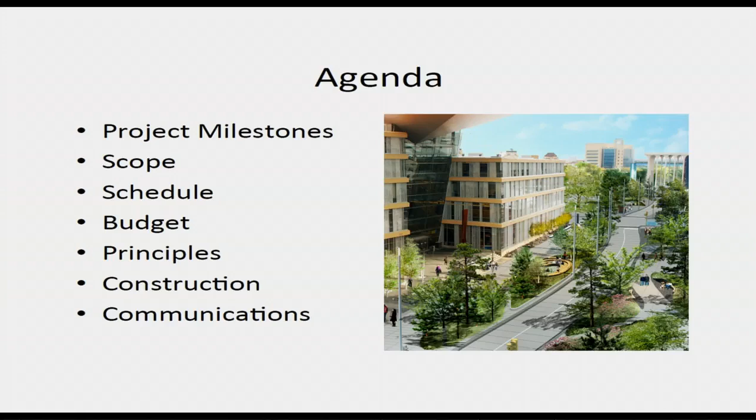Topic for today is Nicollet Mall. No action items needed, it's just an update of the project and where we're at. Today I'll cover project milestones, scope, schedule, and budget - those are pretty standard items. I want to review the project principles, go through construction with photos, talk about our communications, then look ahead into 2017.

I think it's good to review how we got to where we are today. In 2012 and 13, we established an implementation committee and got the design going. In June of 2014, we had the concept design approved, and that's when we got the state grant. In May of 2015, the special assessments were approved, and then I had a fully funded project. We told the utilities to go.

In December of 2015, I had a single bid and could not move forward. By May of 2016, we got a redesign done, got the bids out, and awarded a contract to proceed. In June of 2016, we started the roadway project for Nicollet Mall.

Generally, the scope is total redesign and reconstruction, building face to building face, from Grant to Washington. We're taking out the slippery granite pavers and sidewalks, the roadway, the lights, signals, bus shelters, everything's coming out. Along with that, most of the utilities are being upgraded along with the project, the underground utilities.

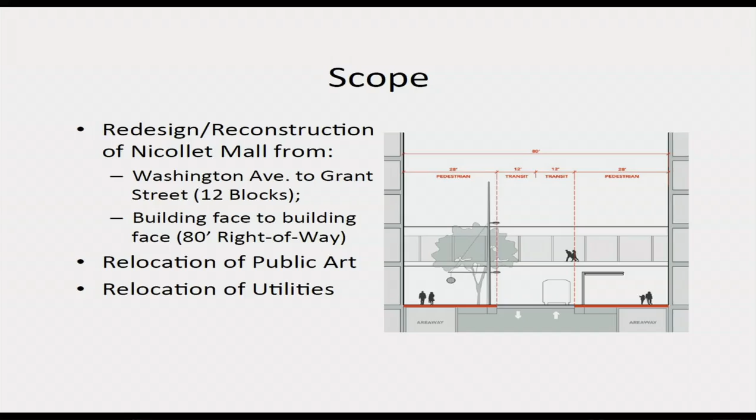What we're putting back: a new pedestrian clear walk zone, more green and trees with plantings. A new elegant lighting system will go in. The old lighting was low, shined in your eyes, created a lot of glare. The new lighting is very high, and more uniform lighting is going in.

And raised intersections, making pedestrians a priority, where the roadway comes up to the sidewalk level so it's straight across for the pedestrians. 11th Street is a good example. That intersection is nearly complete except for the signals going in. If people want to see what that's going to look like, that's in place right now.

Schedule for the project - there's a little red dot that shows where we're at. This is a schedule going back to 2013, but essentially the utility work began in 2015. The main roadway work is in '16 and '17, and we're on track for substantial completion by the end of 2017.

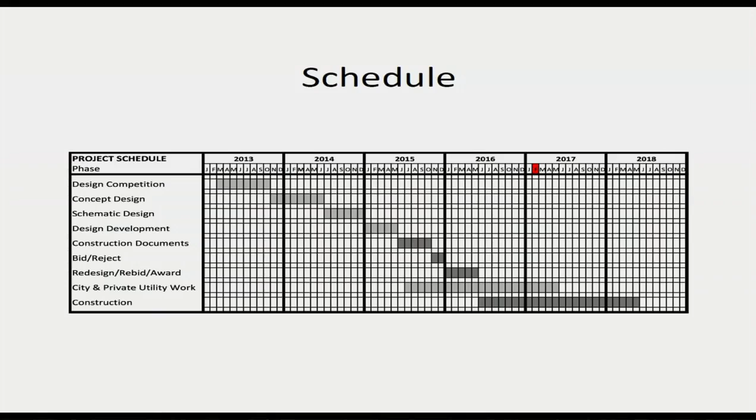Budget - it's a $50 million project. There's $25 million in state grant and city funds. There's $25 million in private investment through special assessments. The project is currently on budget, and it's tracking to stay on budget as of right now.

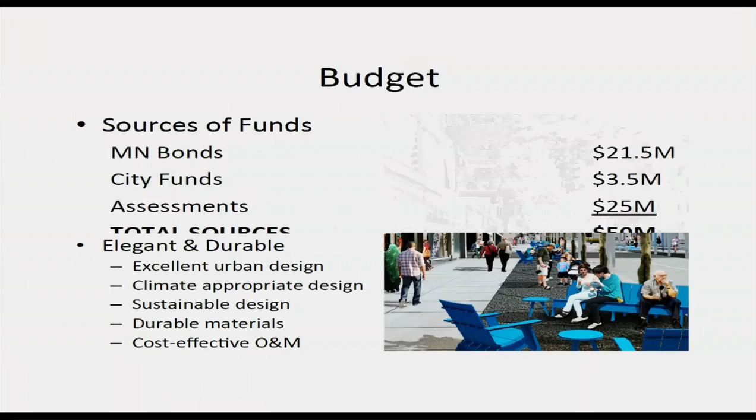Some guiding principles for the project: it's a place for people. It's pedestrian friendly. It's green. It's year-round use, and we're trying to activate all 12 blocks. It's elegant and durable, it has an urban design, and it has cost-effective operation and maintenance for what we're putting in out there.

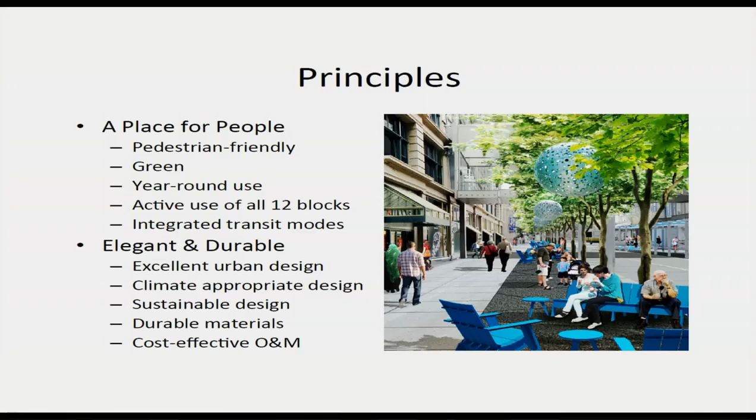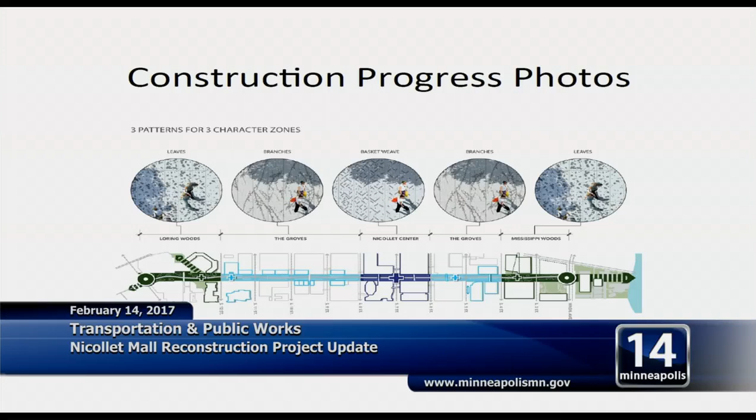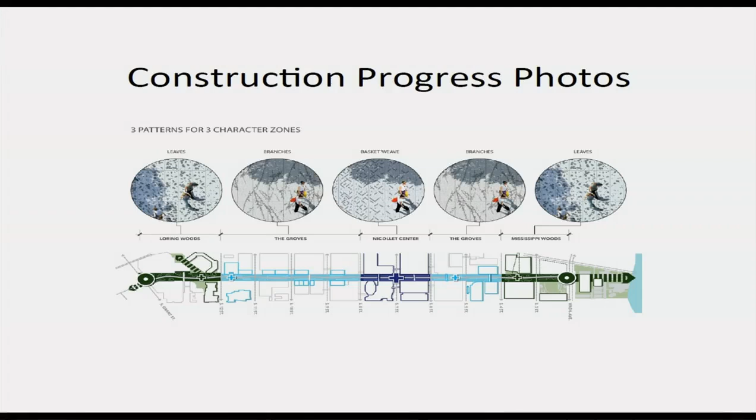Present progress and conditions - there's three main parts to this Nicollet Mall project. I have an underground component, an at-ground component, and an above-ground component. I really have a three-dimensional project going on Nicollet Mall. A large portion of what we do will not be seen by the public, and when we're done, they won't even know what happened. It's all going on underground or right below the sidewalk, and it's a very significant amount of work to get that done.

For the most part, the surface work out there is complete from Grant to 11th, as well as the west side up to 10th. And then there's a portion at the IDS building that's completed. It's ready for trees and lights.

I have some construction photos. This is our stenciling process that we've talked about. In the upper left-hand corner are metal stencils - there's about 32, with 3 different designs, and different intensities of elements in these stencils. So what happens is, on the right side of the screen, after the concrete is placed and sets up, these stencils are placed down on top of that concrete. Then there's a high pressure etching process that goes on, and the end result is that lower left - that's the look and the texture you get to the concrete sidewalk that's out there.

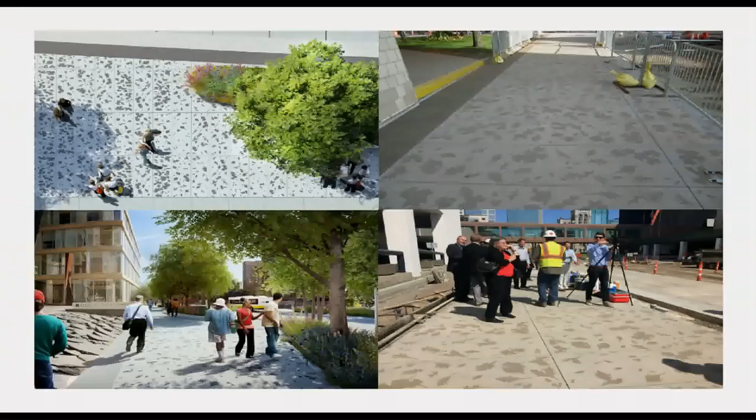So on this photo, on the left-hand side is the computer graphics we were showing through the design, and on the right-hand side, that's what we have. They're very close to what we said we'd do. There's different intensities of the pattern - some are closer, some are farther apart. So what we showed is what we have.

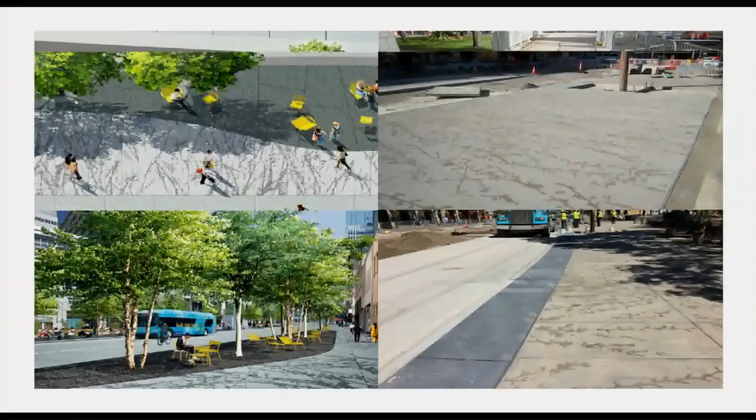In the Groves area, similarly, on the left is what we were showing, and on the right side is what we have today. These are in place. That photo there on the right, I think, is near Peavey.

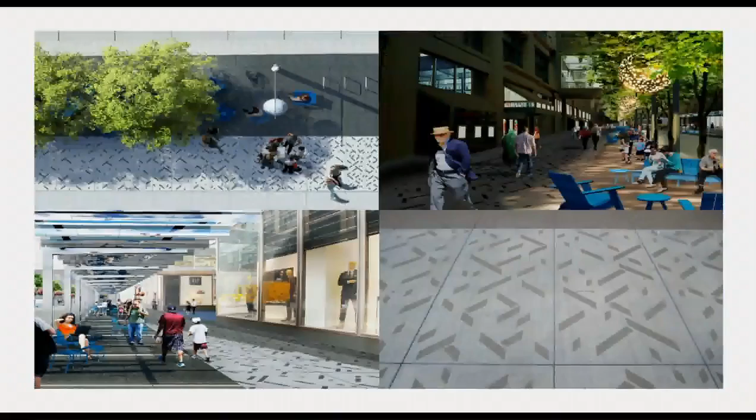And then in the center portion near the IDS, we have that pattern - what we were showing and what we ended up with.

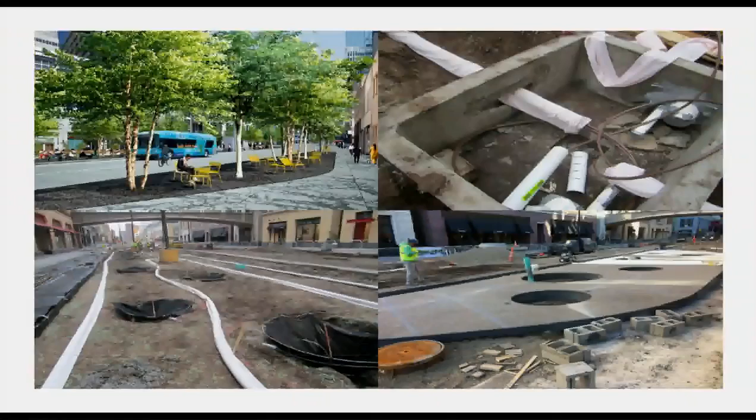Things that go in at ground or just under the sidewalk - we have extensive irrigation going in for the planting areas and the trees. In the lower left, we have tree baskets, which indicate where we're putting the trees. It's kind of a placeholder, reserving a spot for the trees. Then the irrigation system goes in. The upper right, it all connects into a main controller box that will run the irrigation system for the trees and the plantings. Once all that gets put down - I won't say there's miles of irrigation because I don't know the exact fact, but there's a lot of irrigation going in.

It's all covered up with the concrete, so I have to get all that in place. Then that concrete goes down, and it's all ready to go for the trees to come in.

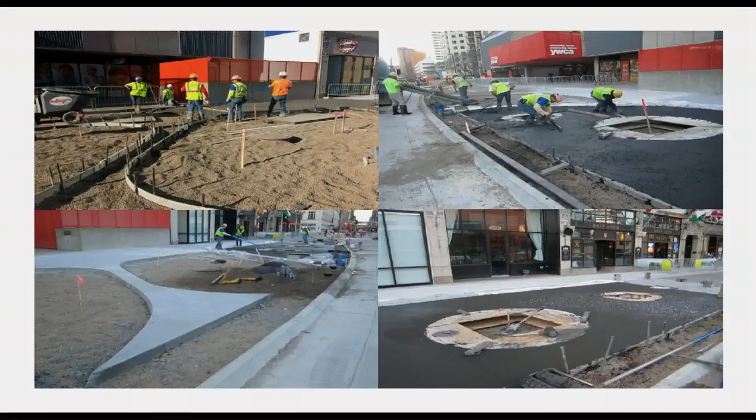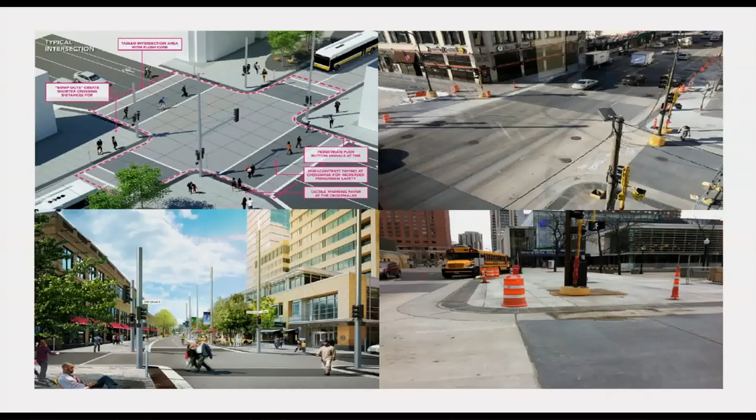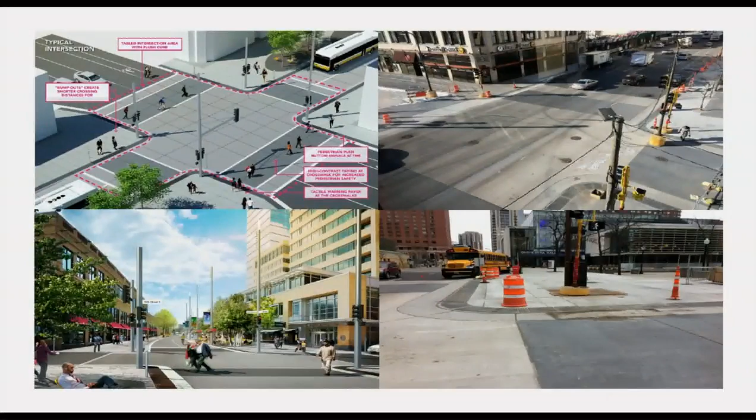The crosswalks are a different color to indicate where the pedestrian should go. In order to put this in, it goes in multiple phases. You have to pour the different colors at different times. I have to keep traffic open for vehicles and pedestrians as well. So the construction of the intersection is very complex, half at a time, keep everything open and get the trucks in there at the same time. But when we're done, that lower right-hand corner gives you a good perspective looking at Peavey, how that sidewalk matches right in at that intersection and what that's going to look and feel like for the pedestrian experience.

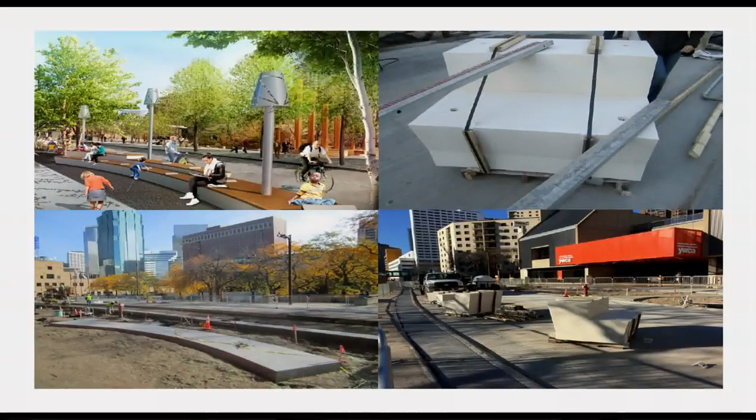Reading room. This is future installation of items. The upper left-hand corner is the concept of the reading room. Lower left is the foundation poured for that bench work, that's in place right now. And in the upper right, we brought in the pieces for that bench. It goes together like a puzzle. And on top of that are wood slats that are being manufactured right now, so that will go into the mall as soon as that wood's ready to go.

The groves. I really like this picture on the right-hand side from the Skyway. It gives me a great perspective of what this is going to look like, looking down from the Skyway. Left-hand side is the local and barrio. The pedestrian through-zone is right in front of the buildings there, about a 10-foot pedestrian walk zone. Out beyond that are these grove areas. We have the poles ready for the trees. It really starts to give a good sense for how big of a space we're talking about out there for programming, pedestrians, and use.

The future roadway is to the right of the groves. Will be that narrow band, and then there'll be more sidewalk on the far side towards the newsroom. But I like this perspective. It really gives us a sense for what we're really going to be putting out there when we're done, and how much space we have to work with.

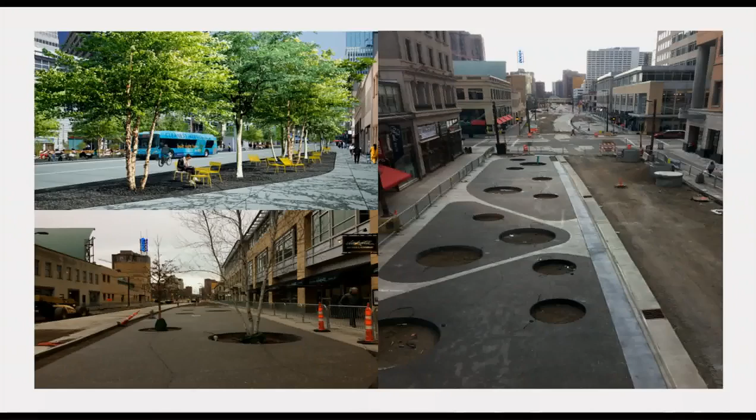And that's in place right now, it's at 7th and Nicollet. If you go out there, you'll see it. There's some protective wood around the base, but you can see it up above and see what it's going to look like, what the mirrors are going to look like, and get a sense for what this corridor is going to be.

Furniture, deliveries in progress with the furniture, and we have some on site right now, not on the Nicollet Mall site, but in a secure storage area.

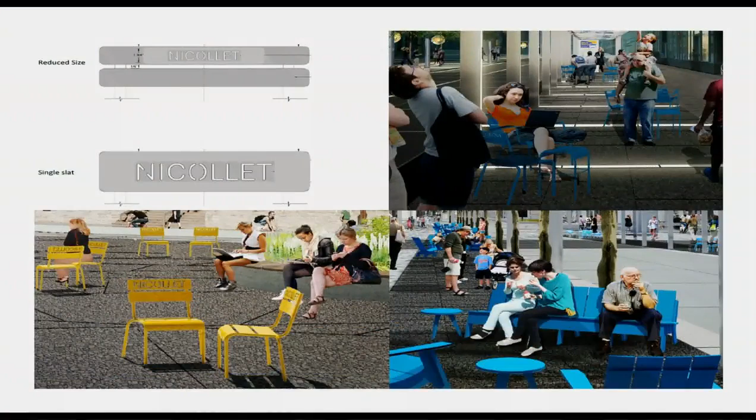Complexities of delivery. The at-ground complexities for this project are significant. We're providing a 10-foot clear path through the corridor, along the corridor. I'm also maintaining access across the corridor at all the side streets, and maintaining access to all the businesses at all times during the project. A challenge, we have a solution for these challenges, but it is a challenge to keep a lot of people going through the corridor, and that's the good news. We're open for business, we're keeping people moving through the corridor.

We have been creative, building plywood sidewalks and bridges to get people into restaurants or businesses to make it accessible, as well as the pedestrian fencing you see there. We have over 2 miles of pedestrian fencing on this project to keep pedestrians safe.

That's a key piece. We have temporary signs, detours, and temporary sidewalks as needed. We're building bridges as needed. We also have temporary crosswalks, temporary signals, and temporary pedestrian level lighting. I've got to make sure it stays lit, and I've got to make sure I still have crosswalks, but I have to take all the old stuff out and offline. So it's a significant effort to make this passable and usable for pedestrians.

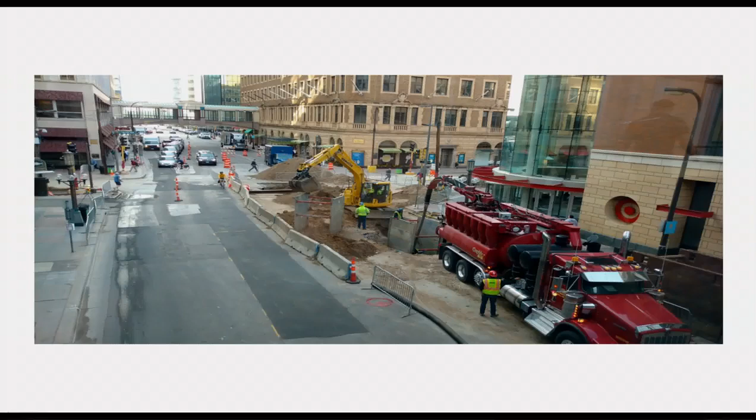Upgrades were needed now so we can provide the service needed for the future. This is a key piece of the overall Nicollet Mall project. I needed to keep existing facilities operational during the move because we're unable to take everything offline, so we have to build new before we can take out the old.

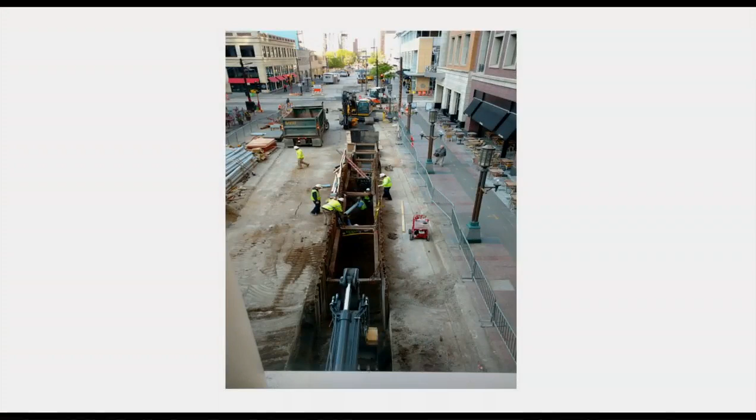There's not a lot of room in the corridor. In other projects, we can open up the road and all the utilities come in, but this photo shows the limited space we have to work in. This is a utility trench, and there are utilities on both sides of it and below it that they have to work around to put this in.

I have an operational sidewalk cafe on the right and another on the left, and I only have enough room for one truck to get down that street while we do work on this corridor. It's very tight, very constrained, and there's just not a lot of room. This takes time and significant effort.

Communications have been a key piece to our project. We have web pages for the project, but we also hold weekly construction meetings. This is key for our project team and the businesses right on the corridor.

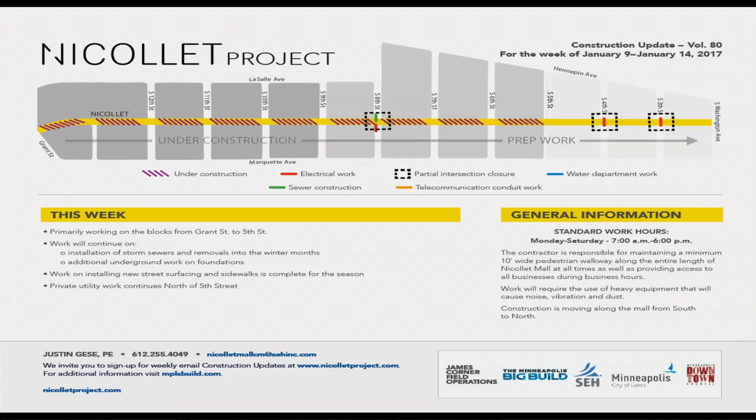Every week we get together and talk about the general conditions on the project, what's happening this week and what we got done last week. It's important for the project team and businesses to understand some of the challenges we run into, some of the challenges they run into, and events they have, and how to make it all work. At this meeting we talk these issues through.

We talk about any updates and accomplishments as well, and this goes on every week during construction. We also send this out in an email blast format to tell anyone signed up where we're at this week and where we're going next week.

There's also been media attention on this project, as well as one-on-one individual meetings, where we meet with property owners to figure out how to build a bridge to get people into their business. Our schedule sometimes gets down to the exact hour—can you not do that work until after 2 in the afternoon? We try to accommodate businesses and what they need.

We do as much as we can to communicate so these businesses can plan what they need to do for their work as well.

Looking ahead, in April we're going to pick up right where we left off, and work will progress a little differently than it did last year. The land use changes as I move north a bit. I would anticipate that every block will have intense operational activity on it in 2017.